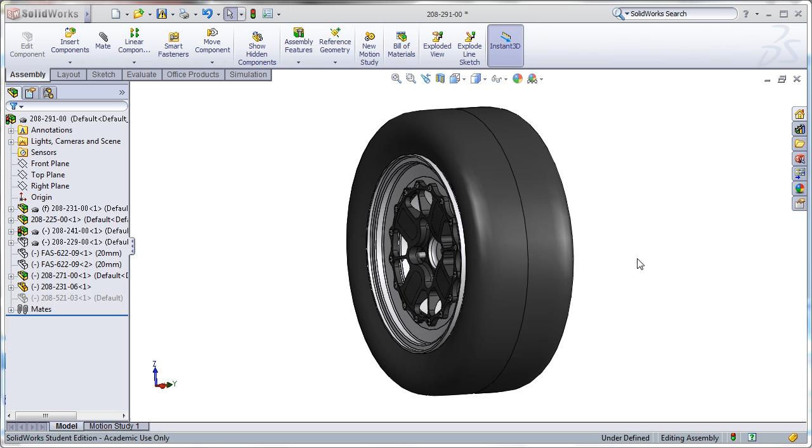This video will cover the topic of fatigue analysis. The example part we'll be using here is an aluminum wheel hub. To make the process a little clearer, I'm going to start working from the context of the entire wheel assembly. Hiding the wheel and the brake components, we can actually see the hub, which is the part that rotates inside of the upright.

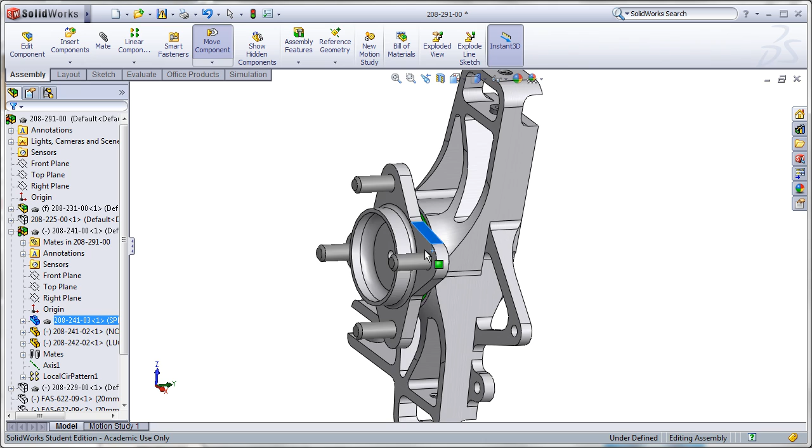As you can see, this is the rotating part right here, and the upright is what is stationary in the model. As the wheel rotates, the hub rotates with it, and almost all the force of the tire is going directly through the hub into this upright. That puts a lot of force on this part right here, specifically cyclic loading.

Looking at an exploded view, we can get a little clearer picture. You can see the two bearings located here. They're right on this surface located over here.

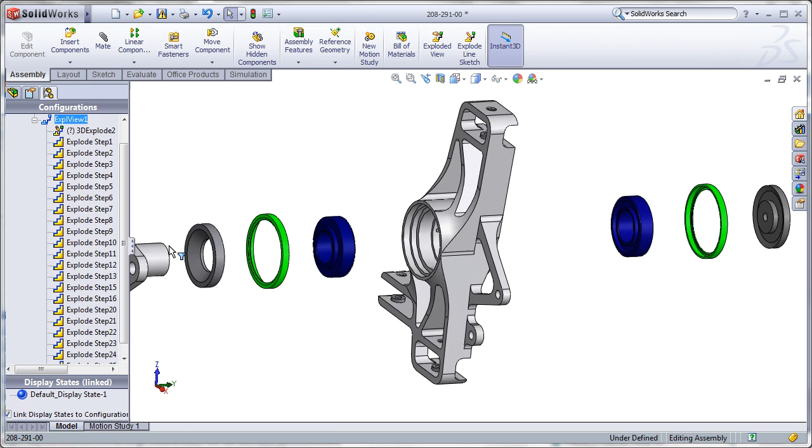Opening up just the hub part, let's quickly take a look at the bearing surface. The bearings sit along this rear part of the hub, but they don't actually go all the way up to the fillet. So it's important here that I put a split line in order to section off just the face that contacts the bearings. This is important later because we'll be using it to constrain the hub as we're doing our fatigue analysis. We don't want to constrain any more of the part than is actually constrained by the bearings in real life.

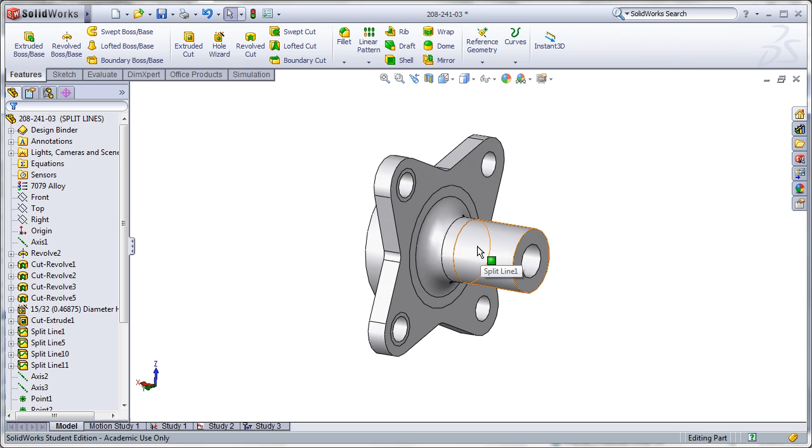Before we move on, I'd like to point out exactly why this analysis is so important. In this case, I've decided to make this hub out of aluminum. While the hub, under the force of the wheel one time, might hold up, you've got to remember that the hub is rotating around and around thousands of times, and that force and cyclic loading could cause a fatigue failure. Specifically, we need to worry about this with aluminum. So it's very important that with aluminum parts that are seeing cyclic loading, such as this, we perform a fatigue analysis.

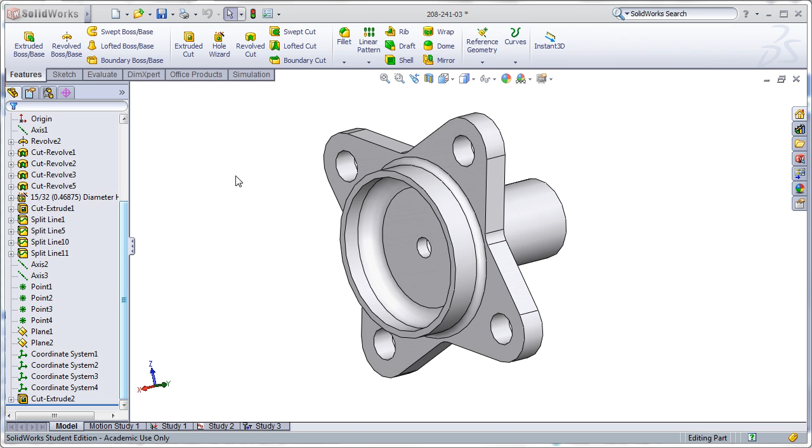The first step in performing a fatigue analysis is to perform a standard SolidWorks static analysis. The results from this first study will then be fed into the fatigue analysis and will allow us to calculate results for cyclic loading. I've already opened up a study that is performed for the first static analysis. Let's take a look at some of the restraints and loads that I've put on the hub in order to simulate the wheel in motion.

The first constraint I've placed is on the bearing surface. This is where most of the force of the hub is going through the bearings into the upright. I've also constrained the surface of this thin ring on the back of the hub. In this specific design for the hub, there's a washer that rides against the bearing and the seal that prevents the hub from moving in either direction. So this also needs to be constrained. It may be different for your design.

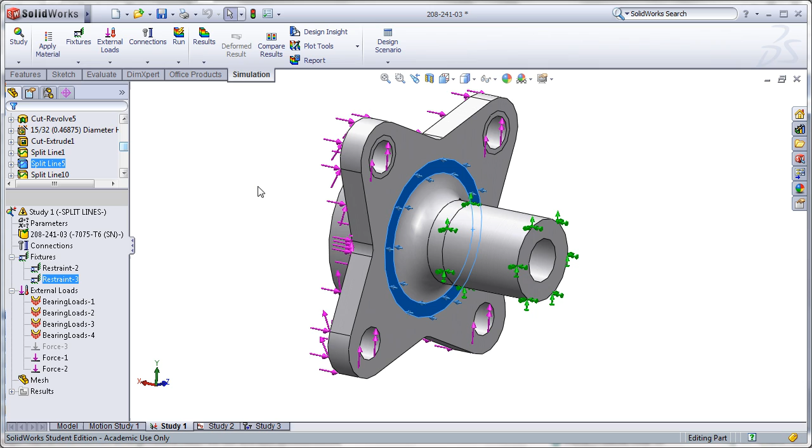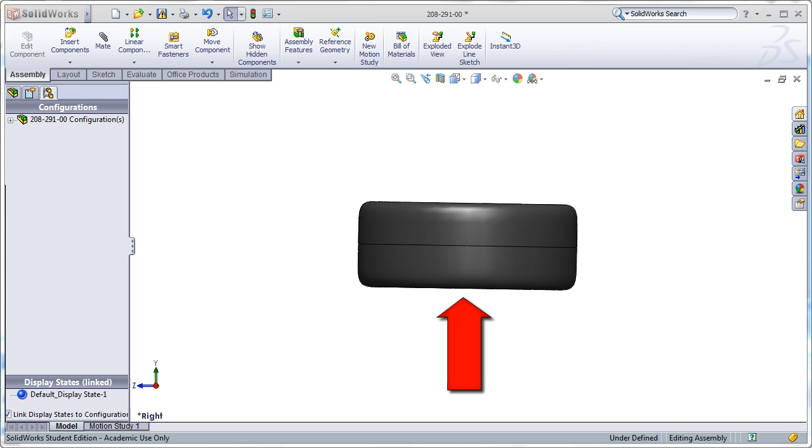The first force I'll add is the vertical force of the static weight of the car going through the hub. I've simulated this by adding 4 bearing loads, each of equal weight, pointed in the vertical direction, going through the hub stud holes. The next 2 forces I'm going to add both come from the side load of the tire pushing in against the hub. This is going to create a force against the hub and also a moment around it. The force of the wheel pushing inwards against the hub I've represented along this whole face by one single force.

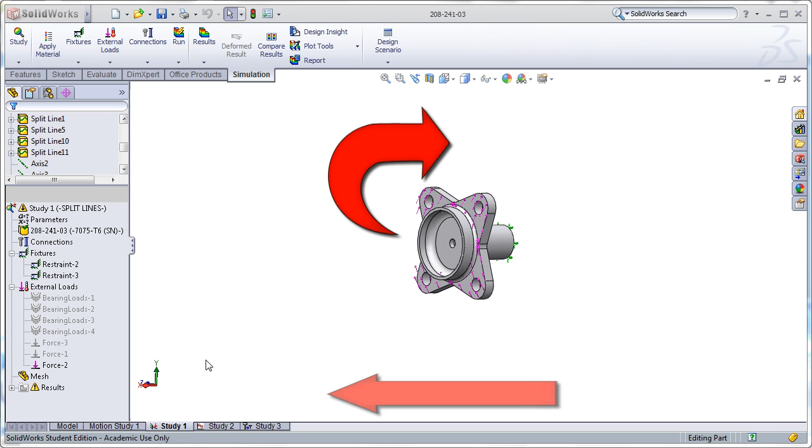The next force is slightly more complicated. It's important to remember that the wheel is reacting with the tire down on the ground. So this actually creates a force inward along the hub as well as a moment around the hub. In this case, to simulate this force, I've added a moment around the wheel center line, which I went and got back from my original model of the wheel assembly.

Now the model shows all the forces and constraints I'll be using for this analysis. It should be noted that these are not all the forces and constraints that you might see or might want to analyze with this hub. The hub also may not see all of these forces and loading conditions at the same time. What I've tried to do here is take some of the major forces at play and put them together to form a worst case scenario.

In your analysis, you may choose to use other forces that I have not included here or omit some of these forces. It's really up to you, and it's very dependent on your design goals with your hub. The next step is just to perform the analysis. In this case, I'm not going to do anything special with meshes, and I'm just going to click Run under the Run command.

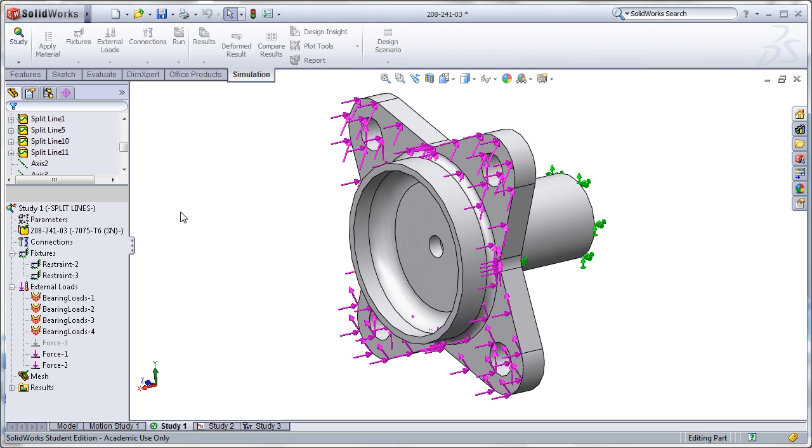Let's take a look at a couple of the plots of results just as a sanity check. Here, looking at a stress plot, we can see most of the stress areas are highly concentrated around some of these nodes here and also the end of the fillet, which is what is expected.

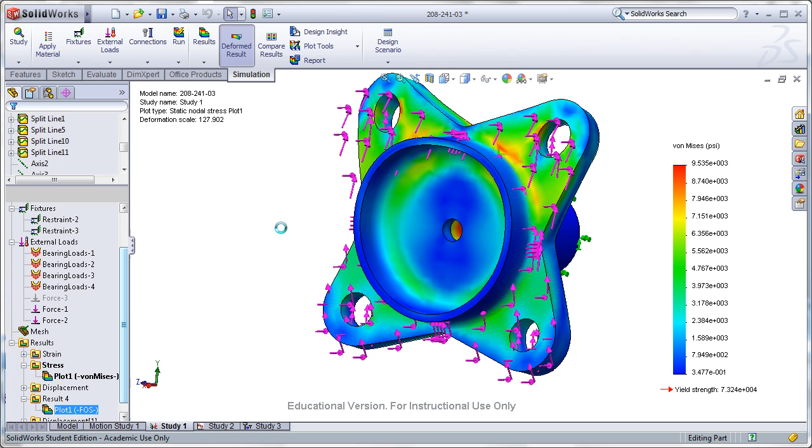Looking at our factor of safety plot, we can see that this won't fail, at least as predicted by SolidWorks. It has a factor of safety, a minimum of 7.7. You're welcome to decide if that's too high or too low. We can see that under this single static load, the part should not fail, according to this analysis.

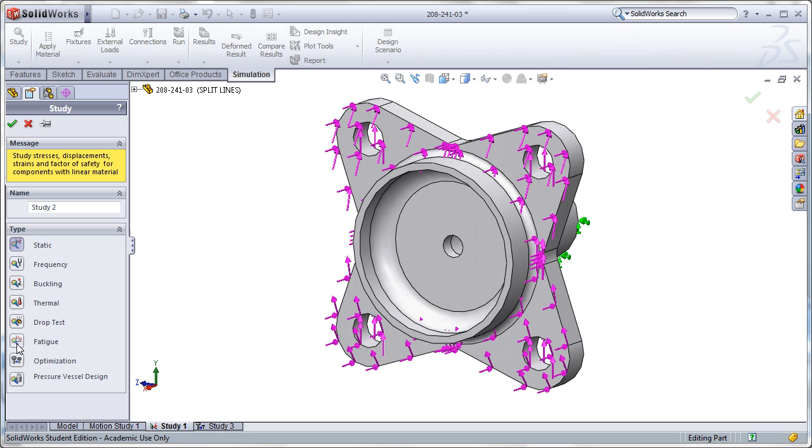For more on doing a normal static analysis, I recommend looking at some of the tutorials, but now let's move on to performing the fatigue analysis portion. Go up to Study and click New Study, and now we should have some more options, one of them being fatigue analysis. The next step is just to add an event. Go up here to the fatigue menu and click Add Event, and then we have a few options.

First, you need to specify a number of cycles. In this case, I'm just going to put an absurdly large amount so that we know the part will fail within that number of cycles and we can see what that number is. Next, I'm going to select what kind of loading we want to perform. In this case, we want fully reversed because the part is going to see full loading in both directions.

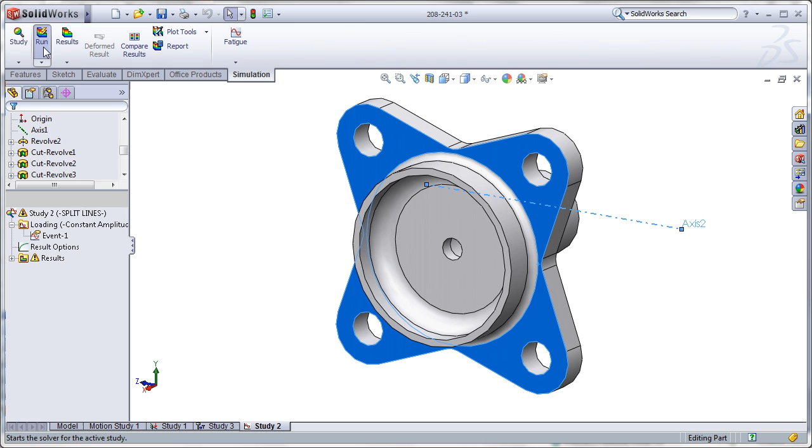And then we can also select the study, but in this case, there's only one study to select from, and we'd also like to keep one-to-one scaling. Now, all you need to do is select Run. Once the study is completed, we can look at some of the results. In this case, I've chosen to go down to the Results tab and look at the life plot. Here, we'll see the plot of exactly how long the part will last.

4 times 10 to the 7th cycles is quite a large number and should suffice for any Formula SAE hub. But you should really look at this number yourself and determine what you need for number of cycles. This is actually a fairly simple calculation to do. If you know a rough number of how many miles your car drives each year, and you can determine the radius of your wheel, you pretty much know how many cycles the hub will see roughly in its lifetime.

That's it for today's video. In conclusion, I'd just like to remind everybody that this just serves as an overall guide to how to do fatigue analysis for Formula SAE parts. You shouldn't rely on any specific design decisions, loading situations, or final results that I've achieved here.